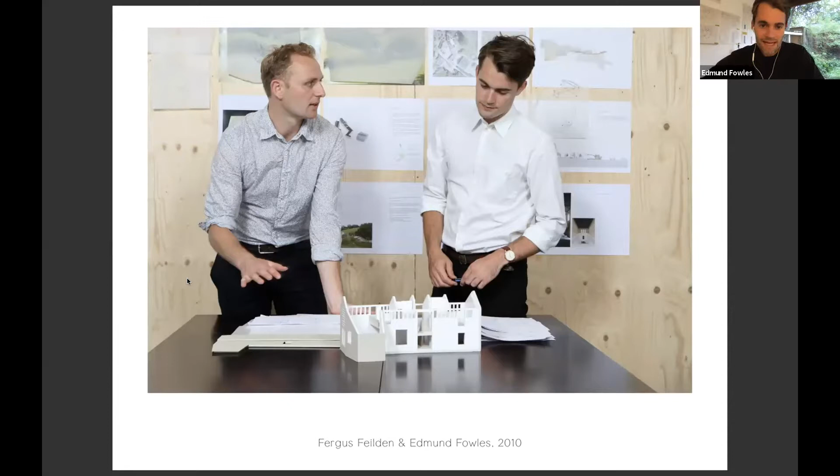And we actually started here, which is a big dirty hole in South Wales, which is where our first project was built. And this was a project for a sustainable longhouse in the Welsh Mountains. And I suppose this project really ignited our interest in an awareness of the impact of what we do as architects. I think it's always surprising for architects when you commit a drawing to paper and then suddenly there's a big hole in the ground, there's machinery everywhere, and there's a building going up on site.

But through this process of making this building, which we were doing during our RIBA Part 2, which is kind of our master's studies, it was an opportunity to really learn through the craft of making, and that's been very central to our approach as a practice. So this was really the kickstarter for us being able to form a practice. We got this building published. We managed to win a few other small domestic projects, and that was all happening.

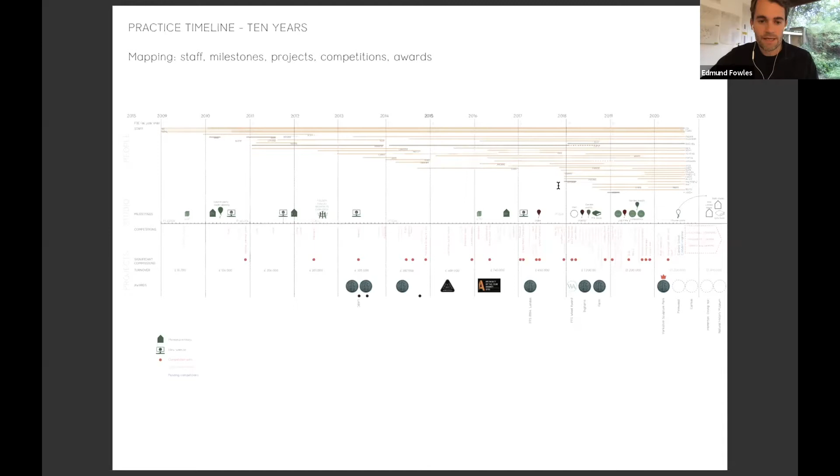This is a practice timeline from 2009 all the way through to today, showing this very long tail of the early days of the practice, with a clutch of projects, which gradually grew, as did the number of people with us, by about 2 people a year through to our present size of 20 architects. There they are there in our garden at the studio.

But as is often the case with young practices, we spent our first 5 years or so really dabbling away with small residential projects, domestic refurbishments. I'm sure projects which many of you are probably familiar with if you've worked in small offices. And these were actually really important projects for our practice to really learn the craft of making buildings, understanding materials. But today I really want to focus on low tech, which is a theme which has begun to run through many of our recent projects.

So what do I mean by low tech? This man has been doing a lot of work recently, making us aware of this rapid decline of biodiversity. So David Attenborough, A Life on Our Planet, I think there's a documentary which has just been released as well.

In the UK alone, 1 in 7 species are threatened. And we all have a role to play as architects. So in the world of ecology and conservation, there's a lot of talk about rewilding. I'm sure you're familiar. There are probably similar schemes in the US as well.

This is an example from Knepp Farm in Sussex, where essentially farmland, which is a kind of monoculture, has very little biodiversity, is left to its own devices and nurtured and encouraged back to its former woodland. And I suppose as a practice, we've been discussing this as the context we find ourselves in. We need to have greater awareness of our impact. Making buildings has a colossal carbon footprint. So what might a rewilding of architecture look like?

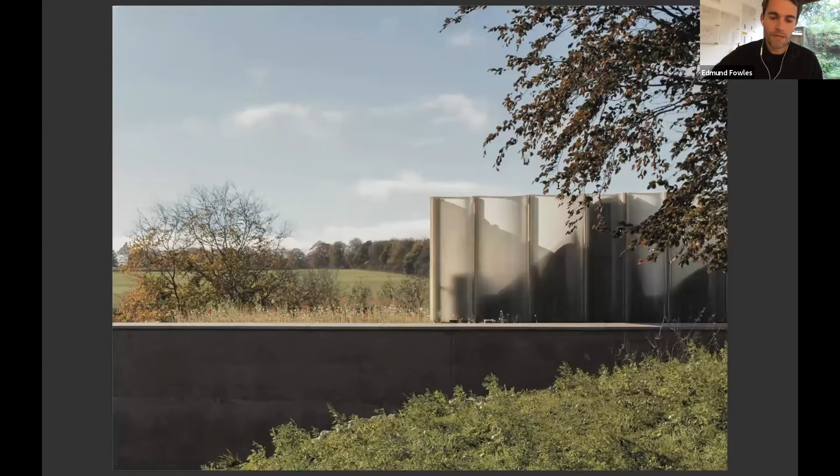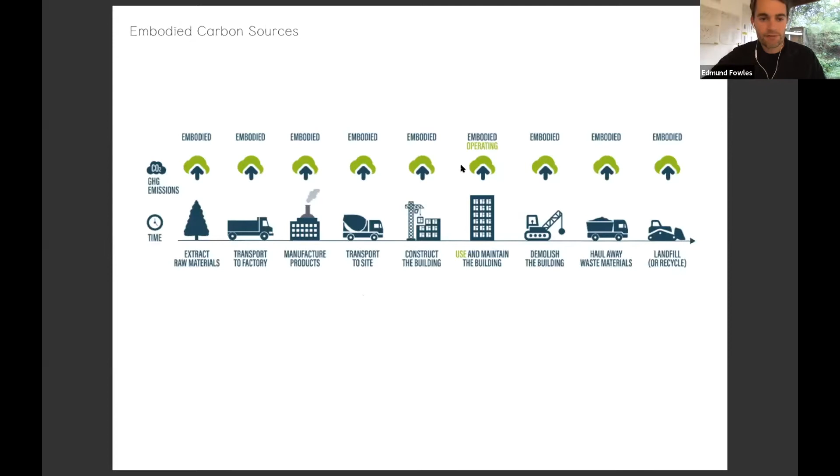What might architecture which is a bit more embedded, which begins with the land and with the site and with the available resources look like? And importantly, as buildings have become more and more energy efficient, the operational energy becomes a much smaller proportion compared to the embodied carbon of making those buildings. Now, embodied carbon can be all sorts of things, from extracting the raw materials through to the manufacturing of them, transport, and so on.

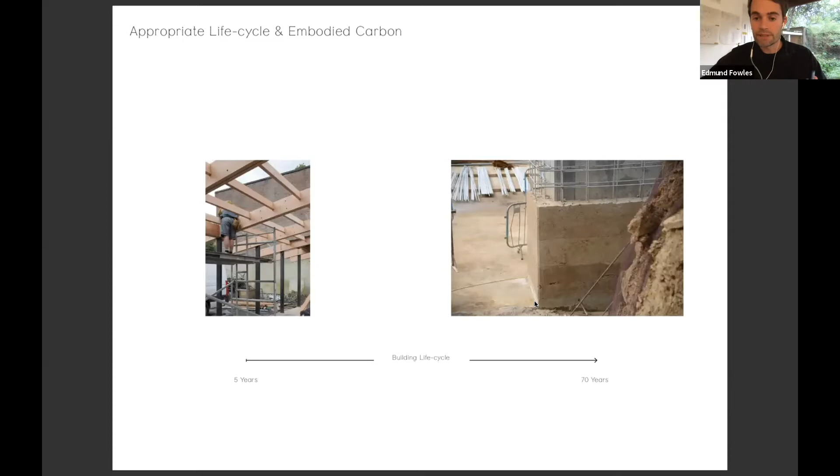And obviously, there's a lot of embodied energy involved through the life of a building, as well as the operational energy. So these are the underpinning conversations that led us to one of our recent projects and the making of our home in Waterloo, which challenges this idea of, how long should a building last? Should it be reused if it's not going to last very long? Or should we be building much more permanent buildings, which are, say, supposed to last 200 years, 400 years? And how might we make architecture like that?

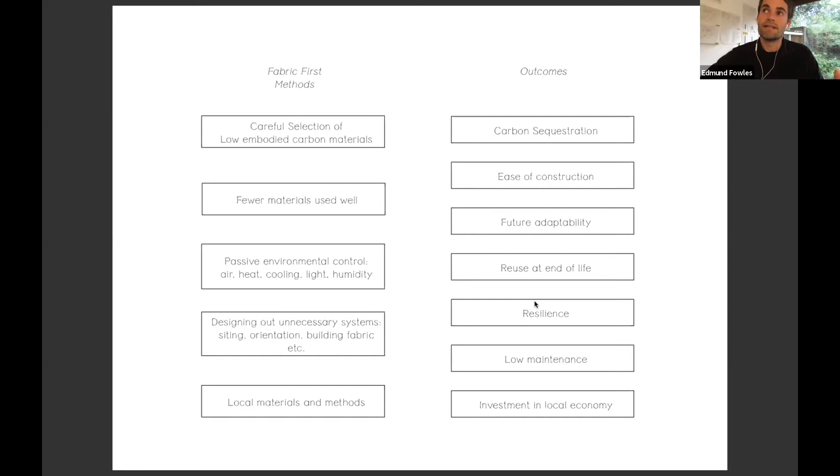So low tech, by low tech, I don't mean that we're anti-technology. Technology has a massive role to play in making buildings smarter. And it's kind of ironic that Philippe used the word innovative in his description of our practice, because to look at many of our buildings, they don't immediately call out, and certainly as a member of the general public, you'd think that many of our works are perhaps buildings from a time past, and we draw lots of our influence from old buildings and from old techniques, because there are many techniques and processes and materials which have been lost to architecture today.

So some of these approaches are summarized here, fabric first approaches. So really starting with the physicality of the building itself, and trying to make that work as hard as possible in order to reduce the amount of bolt-ons of technology that you have to throw at a building to make it energy efficient.

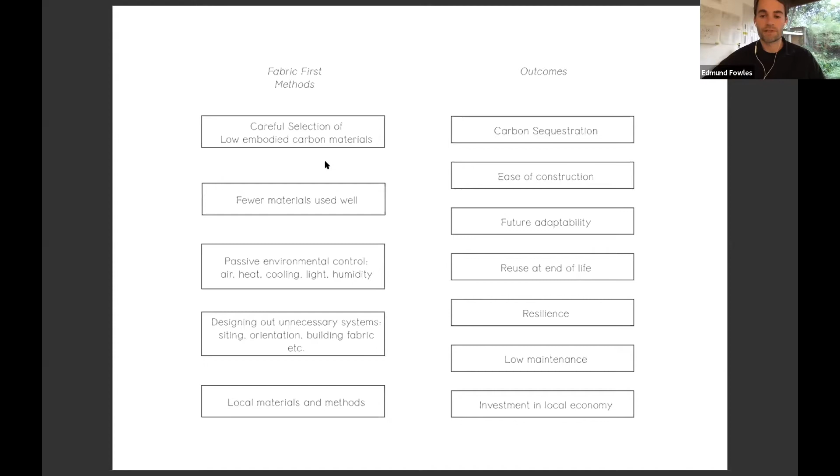So I'm going to go through about 4 projects, time allowing, and talk to you about how we've been experimenting with this approach to making buildings over the past 5 years or so. And that starts really at home. And I think there's no better place to demonstrate your values than where you base yourselves as a practice.

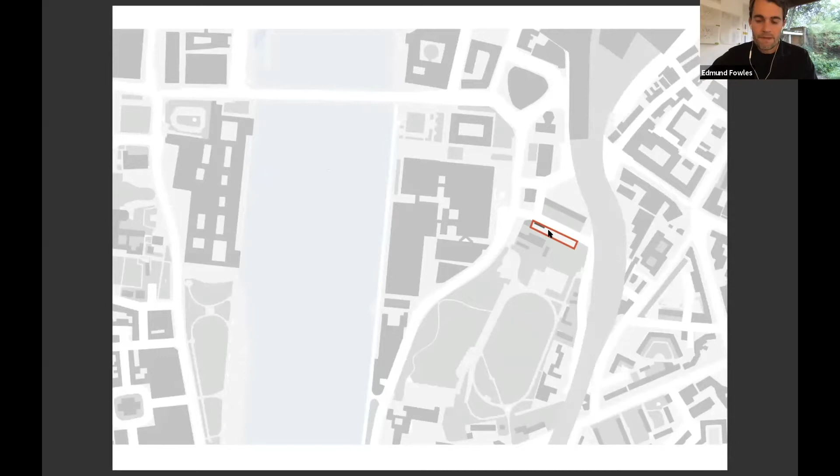And this was a slightly unusual and fortuitous story about our home here in Waterloo. We're just over the river from Westminster. So this is Parliament, just here, the Thames, St Thomas's Hospital. And there was this very abandoned piece of land which was given to a local school for use for 5 years for educational benefit. So really central. This is Westminster Abbey here.

But despite being very central, because we're just south of the river, it's actually a very deprived part of South London. And there's an awful lot of poverty, and children in particular living in poverty. These charities that were offered the land are based nearby, one who runs local schools, and the land was given for the use of getting kids outdoors, getting them to learn from kinesthetic learning, planting, and all sorts of agricultural lessons that could be brought to this site.

So it felt like kind of a perfect test bed for some of these ideas about a light touch approach to making buildings, a temporary type of architecture, which with a bit of forethought could be picked up and moved, dismantled later on.

There was actually a history of temporary buildings on the site historically. So it was a nice starting point to say we're going to be putting back some light touch buildings, but thematically thinking about all sorts of opportunities through the theme of food, whether that be food production, cooking, and nutrition, kids learning about all those things. So we began developing this master plan for the site.

And I should say that there was an interesting economic strategy behind this site. As we became more involved, we realized that the charities didn't really have enough money to pay us fees to deliver the whole project. So we suggested that we could become more involved in the project, design everything, get planning, and help them deliver it, help them fundraise, in return for us building our own studio at the end of the site.

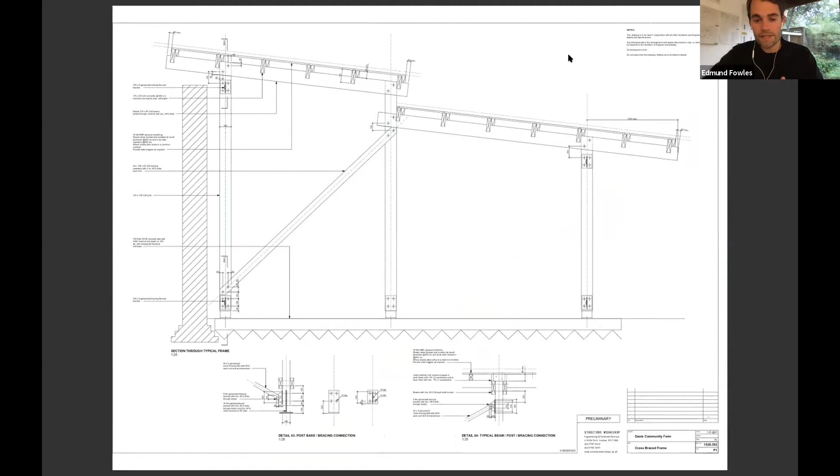So we were quite inspired by really rubbish farmers' carpentry, bush carpentry, just the way that things could be put together by very low skilled labor, therefore cheap labor on the site, to make the initial farm buildings. So lap jointed, using very regular section sizes of timber. And the first phase was delivered within the first year, which allowed the kids to get on site and start getting stuck in with these pigs in the animal pens, there's sheep and goats, there's grow boxes. So that was this whole central section of the site that we began with first.

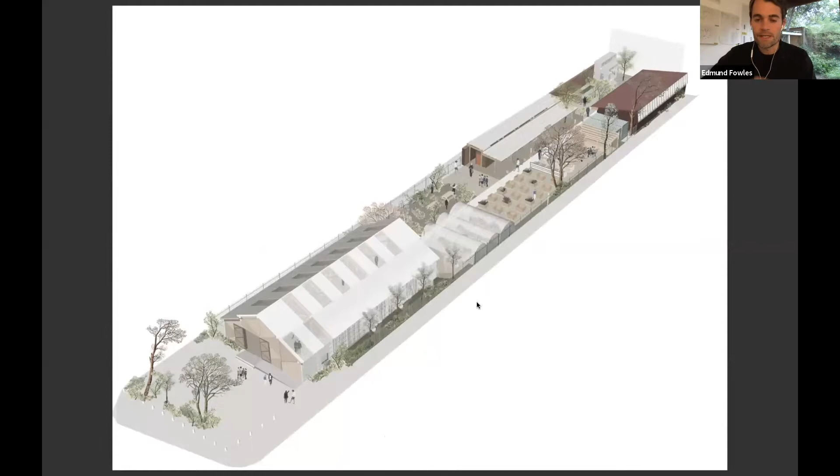And then we moved on to developing the studio site, which would also be shared with the staff and the team who run the farm in terms of shared workspace, shared provision of toilets and meeting space and so on. And again, we used this theme of very low tech, simple means of construction, borrowing from agricultural precedents. And we liked this idea that the building might have quite a blank, enigmatic presence onto the street, through which you came through a garden gate into this lovely wilderness of a garden. And the positioning of the building was key to that.

We were also very keen on the tradition of artist studios, bringing in ample north light from these lovely high windows. This is the Royal Academy of Art, their drawing and painting studio in London. So with this in mind, in terms of starting with the fabric of the building as the first principle, we moved it all the way north up to the road's edge to form a boundary building. And then that formed this really generous south-facing courtyard garden.

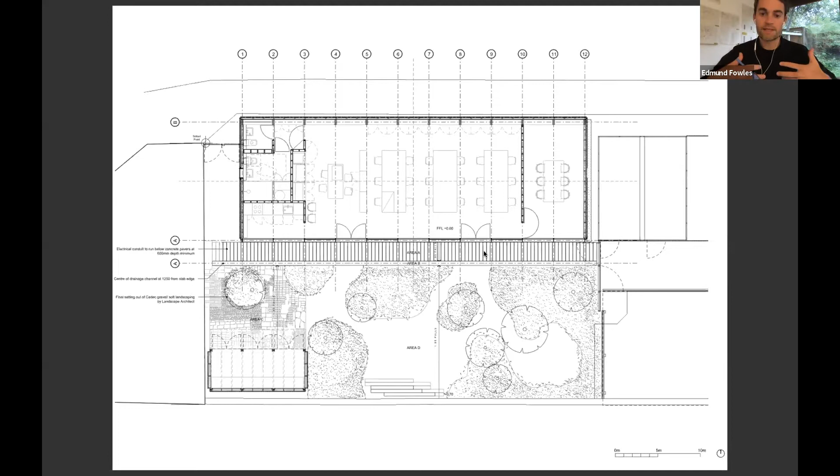We made a very heavily insulated shell to the building, but south-facing with overhanging eaves that should allow lots of winter sun in to heat the building in winter. And there was lots of experimentation with the roof form and how to span the distance in the most economical way without having too much thrust on the perimeter walls. So the technical and the economic challenges of building as cheaply as possible were really driving the form of the building and making the form shift.

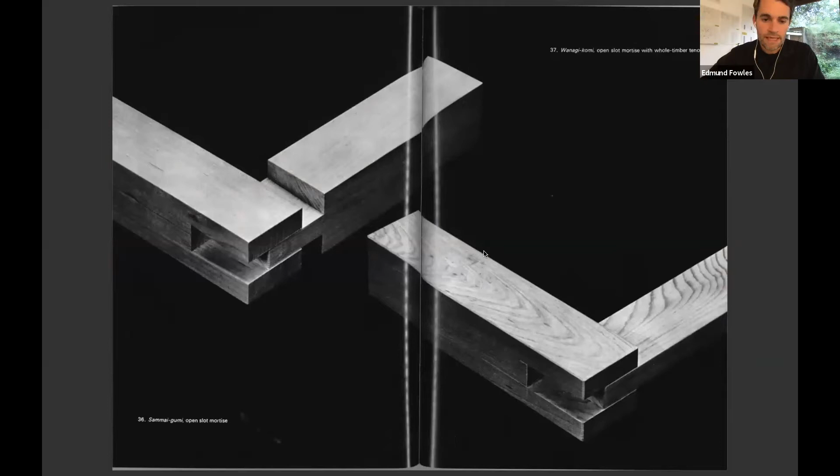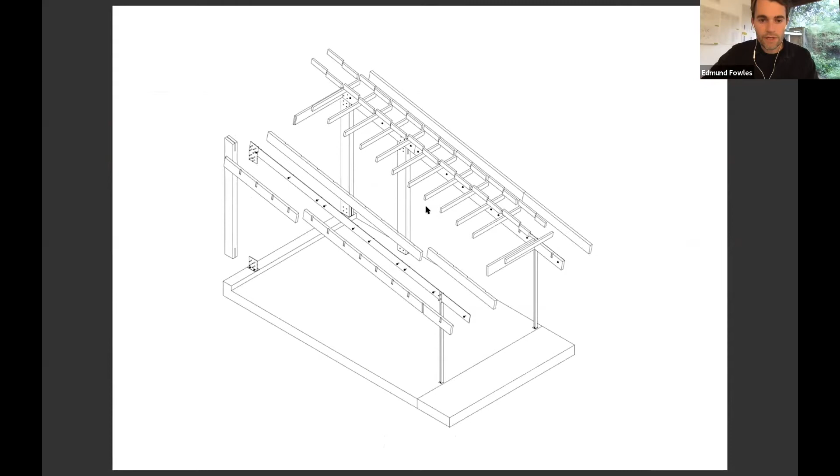We worked very closely with the standard sheet dimensions, using the standard 4x8 sheet for sheathing, and then all the components being easily dismountable, which was driven really by the connections being all pin jointed with stainless steel pins. And this was all tested in the workshop just to see how easy they were to take out.

And then as well as the construction of the building, we were thinking very carefully about the heating and ventilation and so on. And this detail emerged. It was a lot cheaper to actually have a fixed casement window on the north of the building to let the light in, rather than an expensive openable window with hinges and so on. And instead just have a very simple hinged piece of timber down here, which allows airflow above the height of people in the studio, about 3 meters height. So getting a really good cross ventilation through the space.

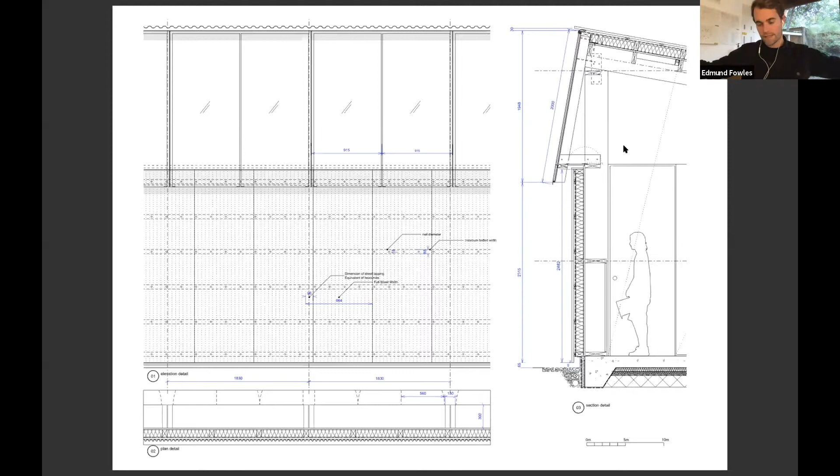We used very simple agricultural materials; this is a material called onduline, which is recycled fibers bound together in bitumen. And we worked with a couple of local craftsmen. Alex actually worked for us as an architect and became a timber framer later down in his workshop in Devon.

Lots of prototyping down there, but using very simple techniques, making jigs. The building was very repetitive, so that made it very economical as well. All the joints were cut simply by hand. The joists were housed because it made it easy for them to be taken out at the end of the building's life. And whilst all that was going on, the slab was poured.

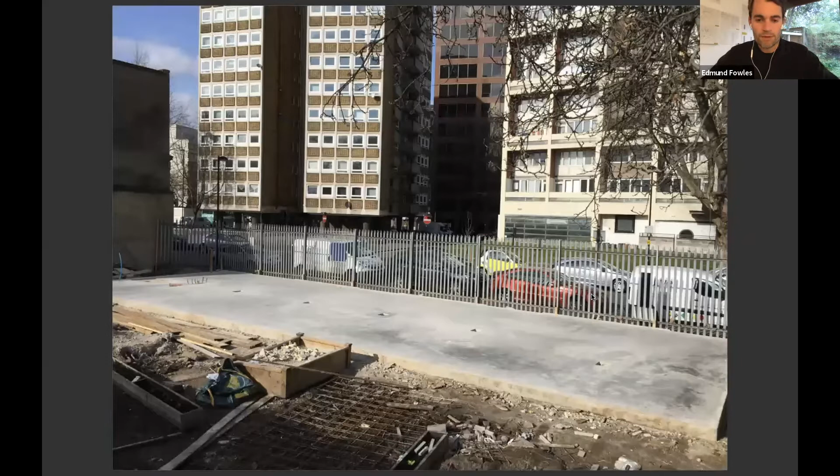And I think this was a great opportunity for the whole studio really to learn from the process of building. We're a relatively young studio. I think most of the studio are still under 30. And so this was a really great opportunity for lots of the team to see a live building project on site, almost day by day, as it went up.

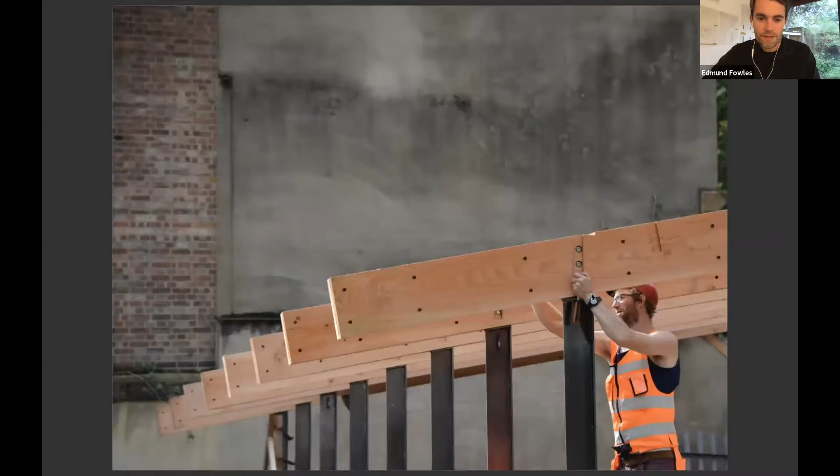So I'll just flick through some of the construction shots. This was the frame going up, which went up in about a week. And then it was quite nice to see a timber frame going up with this backdrop of larger 60s and 70s buildings at the hospital.

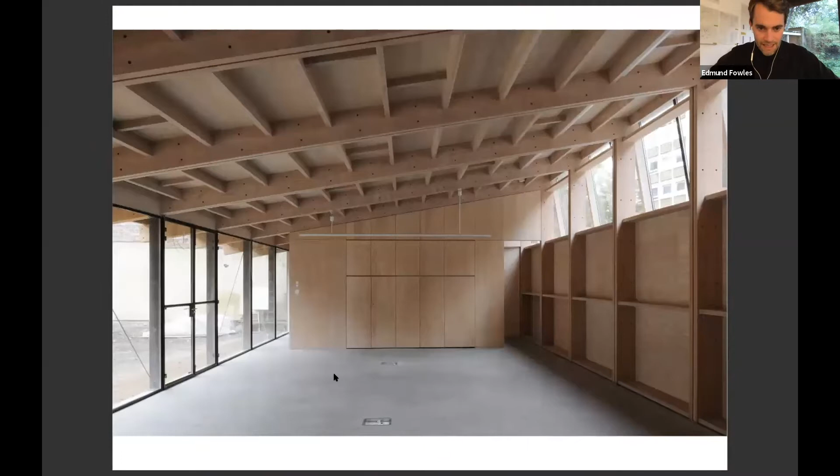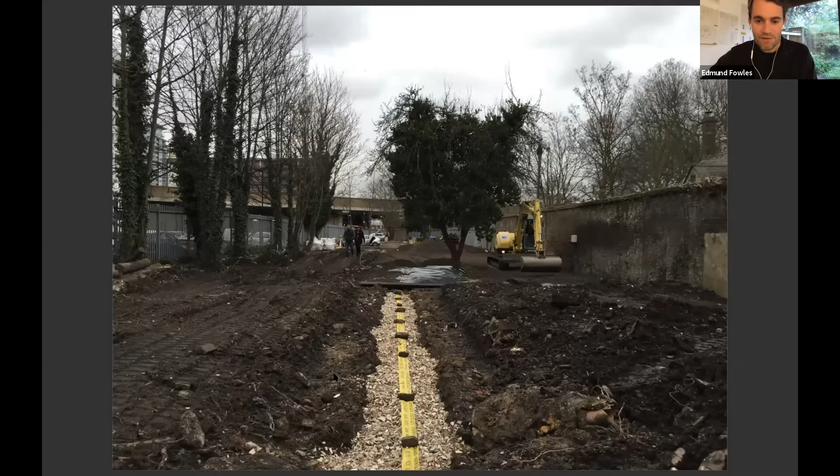And the resulting studio, I think it's been so transformational for our practice, not least because of the amount of extra space and this connection to outdoors, having a garden space that we can spill out into. We can make models outside. This is a before and after image showing the transformation and the landscaped courtyard. And this just shows the building in use.

And so this was the second phase, the last phase being the barn at the other end of the site. And this was really crucial for the economic sustainability of the whole site. So this was a social community space which would allow bigger class groups to congregate from the schools, but also out of hours, evenings and weekends, it could be let out to generate a revenue. So using very similar principles to the other buildings on the site, very simplistic joints.

And this was the barn in activity. So these are some of the rental activities that go on to generate a bit of revenue for the charities and sustain the whole site. This is an uninsulated building, but perfect for summer events in particular.

And then at the other end, there's the more tranquil, secluded garden. And it changed the culture of our practice because we have this place that we can sit outside, that we can, if we're having a tough day of meetings, garden outside, but also the garden room here, which is a model making space.

And I think importantly, it's been an opportunity to bring lots of our clients through the office and demonstrate our values in built form. Perhaps rather than sending them a brochure, we say, well, come and visit us on the farm and see the studio.

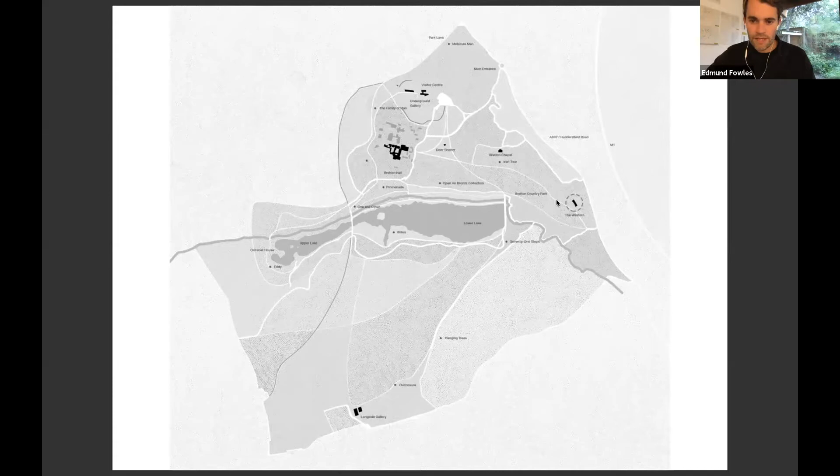So the original visitor centre was up here to the north. The north part of the park was really heavily peopled, but the rest of the park less so, because there were no kind of facilities for parking or for getting a drink and refreshments and toilets and so on. And they wanted more sort of gallery space as well. So this location was strategically agreed upon.

And we began to really immerse in the work of the park, both the more traditional sculptures in the round, but also works by James Turrell. There's a fantastic piece which is situated within this deer lodge. And for us, this was a really beautiful knitting of existing fabric with this new intervention, which is sort of dropped in, offering these wonderful, very contemplative lighting qualities, but also more subtle work, such as David Nash in this work, where he positions these charred timbers as a row of steps.

The site itself was a depression in the land. It was formerly used for quarrying stone to build the stately home and many of the existing buildings across the estate. So it was very much a boundary building right on the edge of a road, a motorway, but then bounding the edge of this wonderful park with views down to the lake.

So we had in mind the work of land artists, and this idea that we didn't want to just conceive and design a building and plonk it down on the land. We wanted to really work with the topography. It was such a dramatic topography, giving way down to the lake.

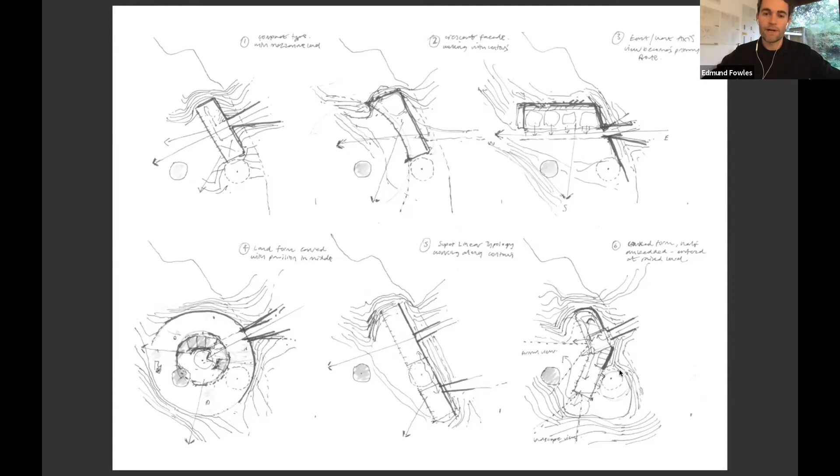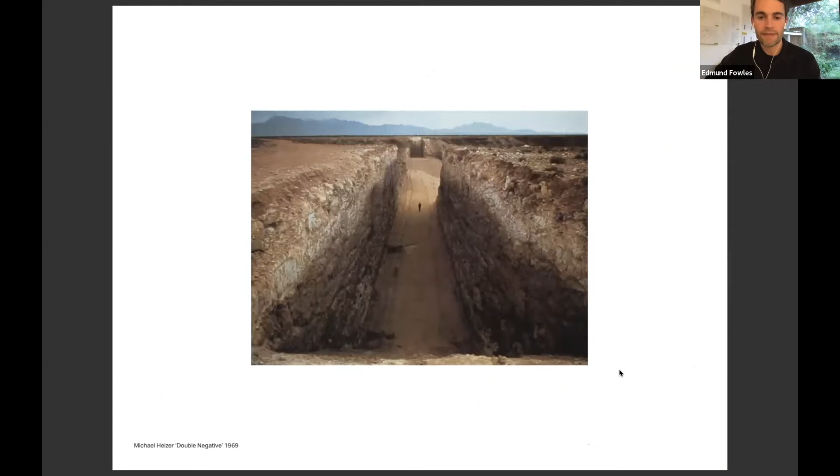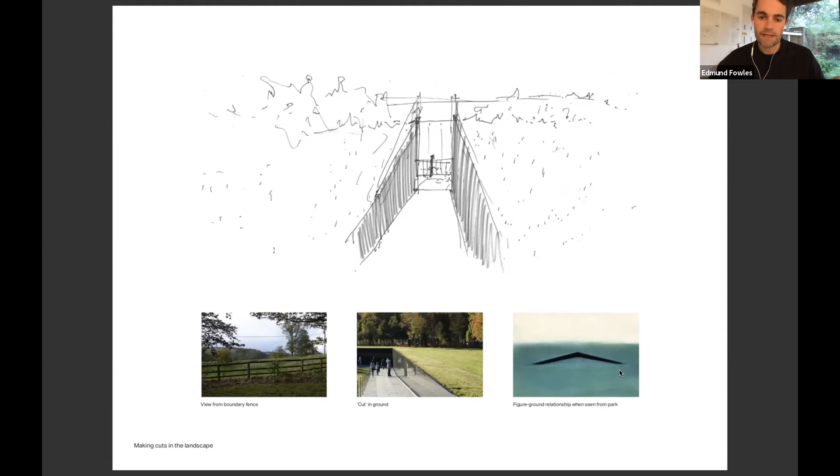And there are some wonderful works by the likes of Michael Heizer, the minimalists of the 60s and 70s, who began in the galleries and then wanted to break the boundaries and start working at much bigger scales outdoors. Robert Morris, and taking these sort of approaches to moving the land and working with the landscape to form space, as opposed to the traditional idea of constructing space. So that was the initial thinking behind it, really enveloping the building in its context.

And that worked quite well actually for environmental considerations of the building. So thinking about the conditions that one needs for a gallery space in terms of very constant temperature, very constant humidity and lighting levels, that works very well for embedding it into a hillside. Whereas the more public elements of the building, we had to form a restaurant and cafe, shop and so on. These were positioned as more of a lightweight pavilion, which was moved out of the ground.

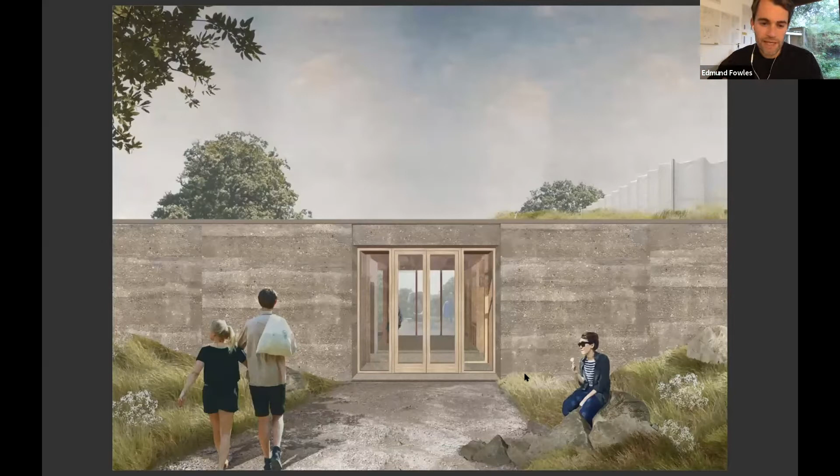So conceptually, we wanted to really reinforce this idea of the boundary to the site with this single cut through the building, which was the gateway into the park. And that was reinforced by this idea to use aggregates that we were excavating from the site in order to make what originated as being rammed earth, but later, for stability reasons, we had to add a bit of cement in there, but ostensibly a very weak concrete mix.

So this shows the three tectonic elements, I suppose: these rammed concrete walls, the gallery dropping in, very heavyweight construction to moderate the humidity, and then the lighter weight timber frame.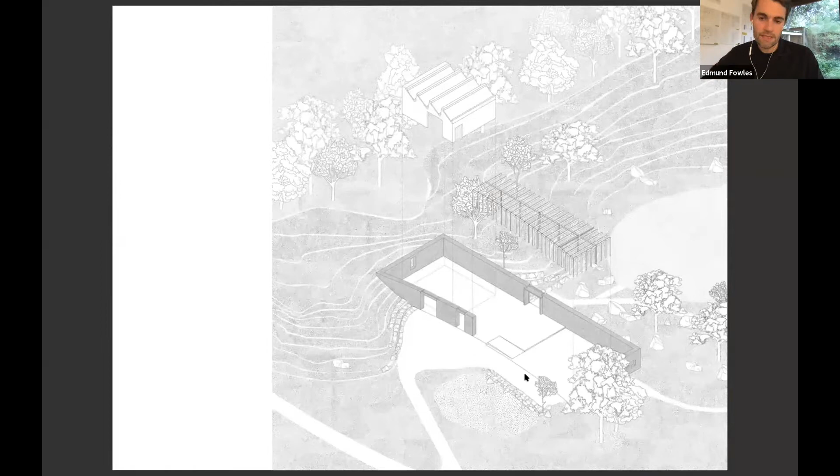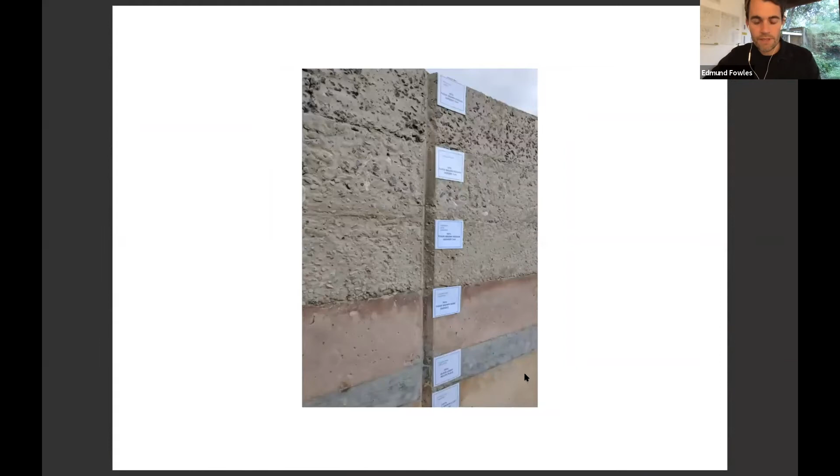We searched lots of the local quarries as well for aggregates to use, as well as some sourced from site. And we were keen to match the tones as closely as possible to the rock that we were pulling out of the ground, which had this very red iron oxide-y tone. And drawings developed and refined this language of a quite striated, almost sedimentary rock form.

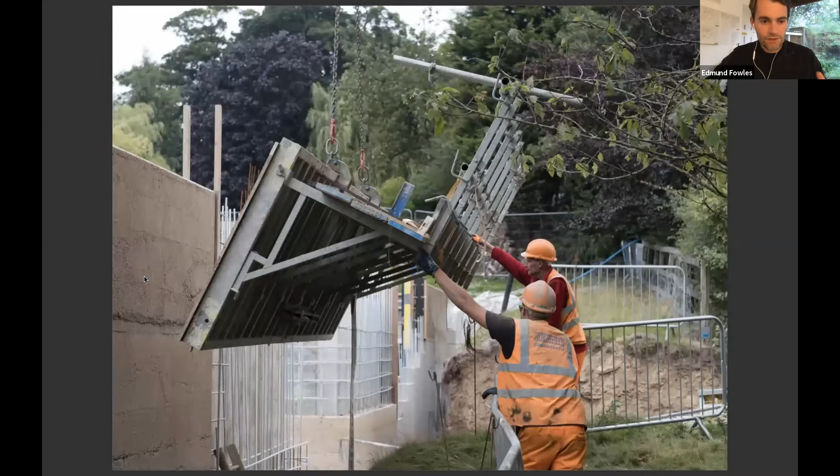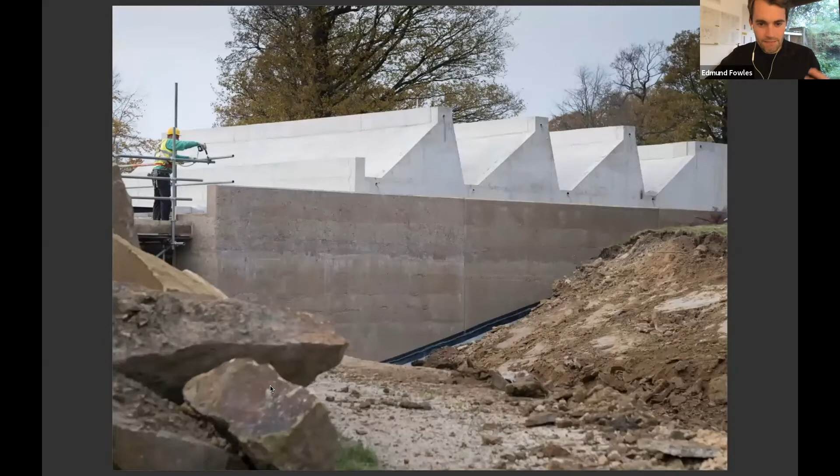All the material was batched and mixed on site, pulled into the formwork. And you can see the very dry mix, very open, porous form of the walls. And they've changed throughout the whole project as the aggregate was varied. But this rock down here is a good example of the tones that were present on the site and how it tied through.

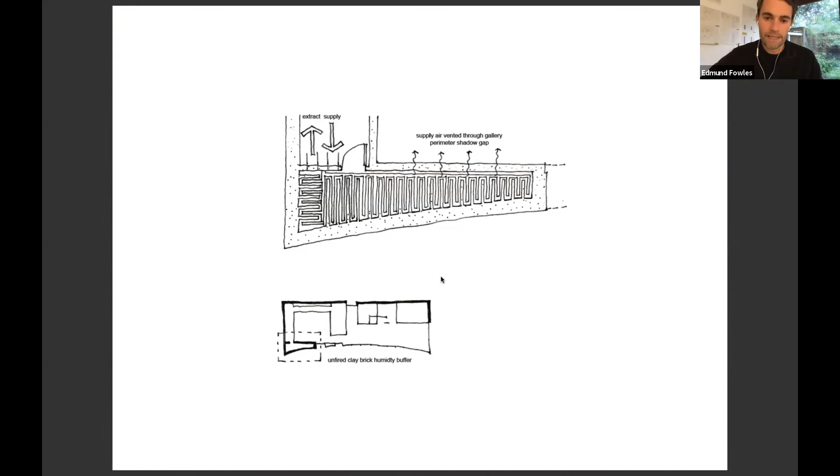So in terms of moderating the humidity, this was a conversation that emerged with one of the M&E engineers about the potential to use unfired clay bricks to moderate the humidity rather than pulling air out of the gallery and passing it through a big piece of HVAC machinery and using lots of energy in the process. We pioneered this approach to draw air through a labyrinth of 10,000 unfired clay bricks.

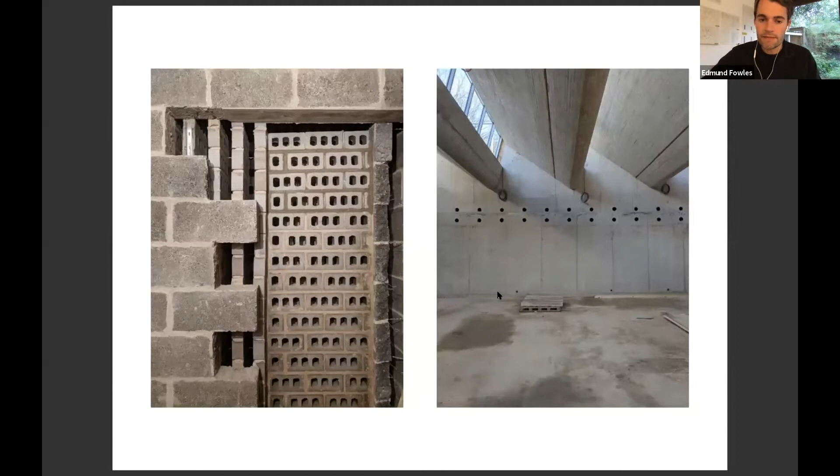So these are the clay bricks in the void here. And this void was created by the gap between the retaining structure and the internal gallery walls. And it's become very effective. We've been monitoring it for the last 2 years since the building opened. The only mechanical assistance it needs is a fan just to draw the air through when there's high or low humidity. And the clay is hygroscopic, so it draws in the moisture when it's very humid and lets it out when it's not so humid. So this is the resulting building.

So there's lots of overlap, I suppose, with the learning that we made on building our own studio here in Waterloo in terms of the timber frame. So it is really a building of two halves: this lightweight pavilion, which is perched on the edge of the hill, but at once also embedded into the hillside.

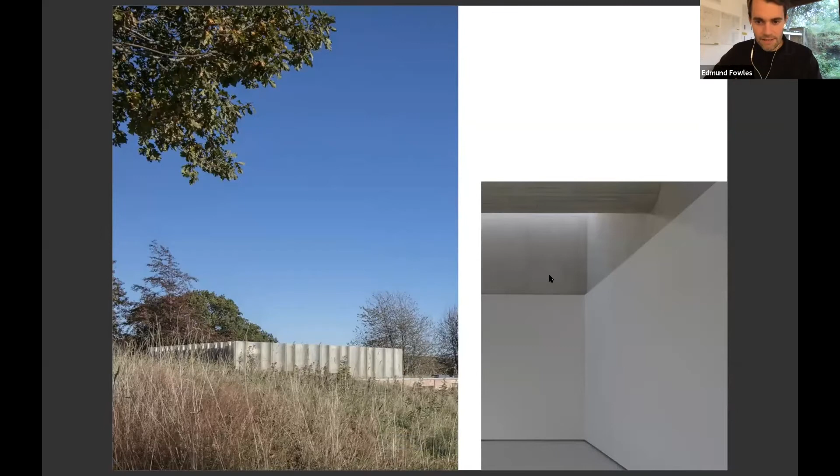So at its deepest, the land really obscures the height of the gallery. We've got about a 5 meter floor to ceiling in there, but it just crests the horizon of the hillside here. And then the wild grasses, acid moorland, local grassland is able to grow up and over the roof of the building. And these large concrete beams were working quite hard in themselves as well, forming roof lights, but also valleys to the roof and dropping in this very nice diffuse light.

And then moving through to the restaurant space. And there were other material decisions, such as using lime plasters, natural plasters, which have this very distinct patina. It's very imperfect, which felt consistent with the exterior walls.

So this was a building that was shortlisted for the Stirling Prize last year, which was much to our surprise. But it has been a really good opportunity. It was our first truly public building, so an opportunity to demonstrate some of these more grounded, earthy approaches to the materials. It was a good process. And through the making of the building, we were making a book as well. So this is now available on our website if you're interested in learning more about this project.

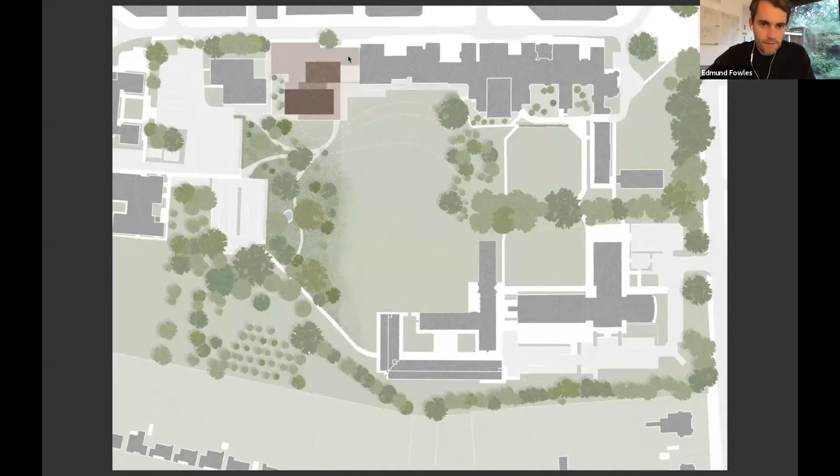And we began talking about the project in terms of an arts and crafts for the 21st century. And I think this sort of low-tech, more aware approach to making buildings and an awareness of the sourcing of materials and so on is so akin to what the arts and crafts movement were calling for. They were calling for the hand of the craftsman to be more visible in the building.

So broadly speaking, the brief was for a new dining hall, a new formal dining hall, seating 300 students, but inevitably with a big kitchen which served not just this hall, but also the wider college as well. So in amongst that, though, we wanted to pull the brief apart a bit and look at the more social aspects and the importance of food as an activator or an opportunity for chance encounters around a collegiate environment.

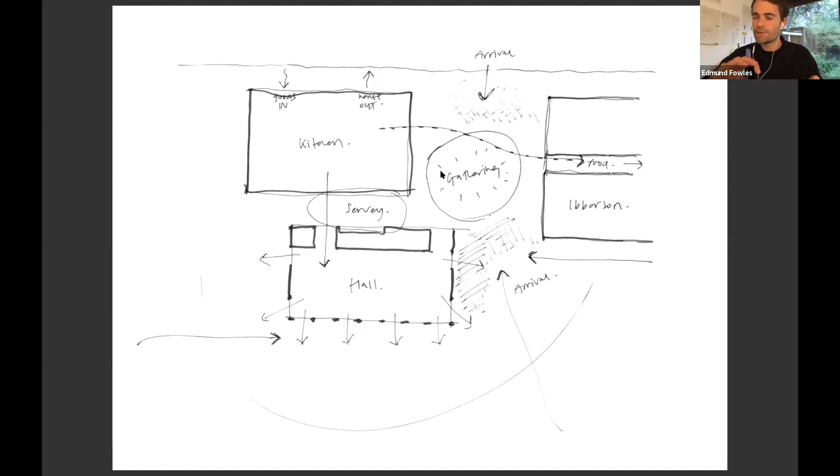So not really focusing just on the design or the intensity being on the hall, but on these fragments of space or in-between spaces around the building. So we actually grew the brief somewhat from the original competition brief.

We were very interested, I think, through the competition process with architects like Van der Laan and his monastic work, building very simple, robust structures in the Flemish regions. And we were working off many of the existing rhythms established by the Ibbotson building with this lovely rhythm of brick columns.

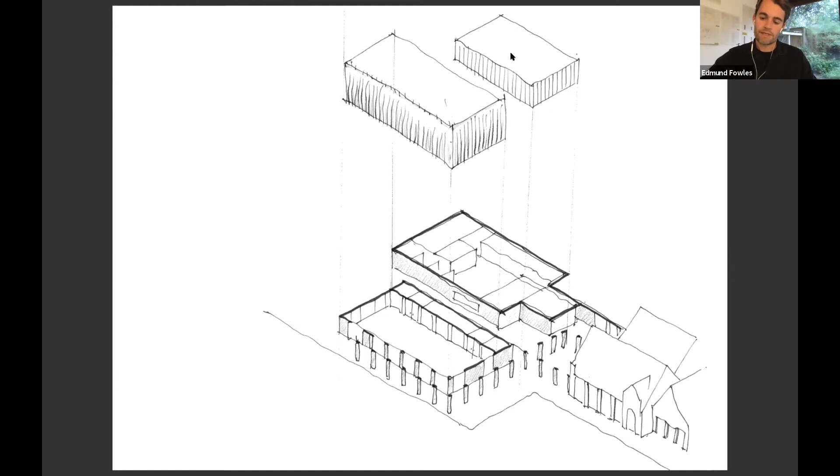But with this idea to place these two volumes, so have a plinth, which was very expressed at the base, and then the hall to be articulated, and the buttery and gathering space, the foyer space, to be accentuated with another volume, slightly offset, and each to have a slightly distinct material character.

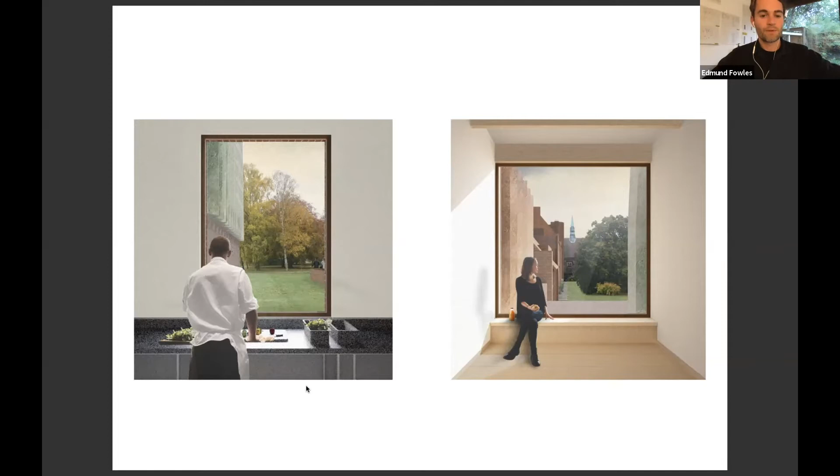There was a lot of interest as well in the quality of life for the people who work in the building, not just the students, but what about the chefs who have to work there, who presently are in the depths of a Victorian building with no daylight, no views to outside. So this image was really important as a thing to hold on to through the project process, hanging on to getting daylight into the kitchens and having a kitchen with a view. So when you're doing your prep, you can look out the window and you're not in the basement.

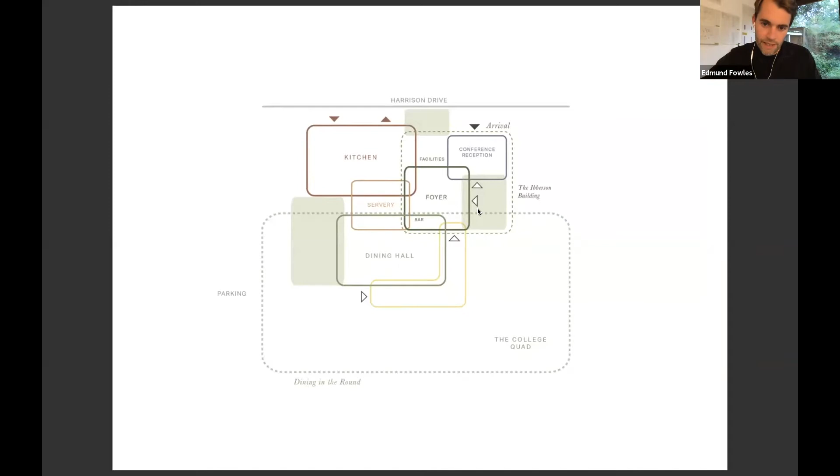So this is how the brief then coalesced, with kitchen, dining hall, this servery sitting between the two. So obviously lots of very critical flows involved in designing food spaces. But with the foyer here and the main college entrance. And the resulting plan, somewhat more worked up, looked something like this.

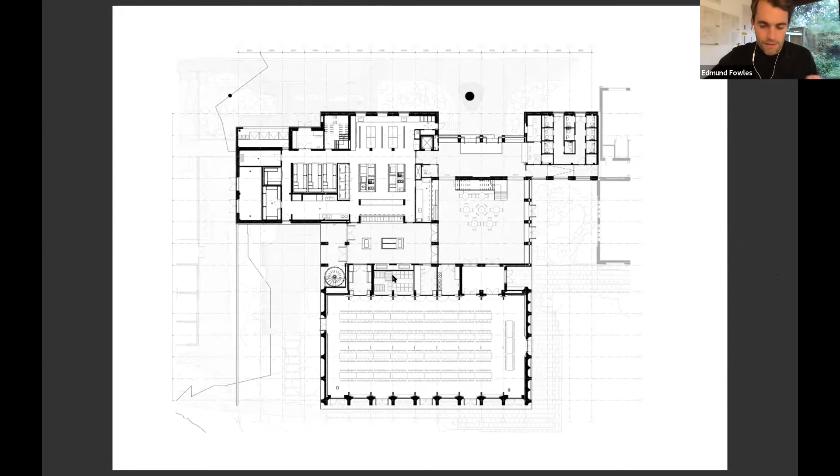So a very strong axis coming from the existing college facilities, accommodation, the bar, down to this generous entrance lobby here. And then this double height gathering space, which out of hours could be used for more informal use, picking up a sandwich or a cup of coffee, the servery, and then this very hardworking spine, separating the building, but also acting very importantly for some of our servicing. And then moving up to the first floor, the balcony space, which overlooks the hall.

So sectionally, the building slightly inverts the typical Oxbridge dining hall, which tend to be very hermetic. They're very enclosed at ground floor level particularly. We wanted to really open up the base of the building with windows out to this small area of woodland, but then also drop in a lot of daylight from clerestory windows, which could mediate passive ventilation as well, with openable windows at high level. So drawing air in at low level and out at high level. We also utilised ground source heat pumps to bring a relatively passive form of heating to the building.

And then there's a small degree, when you've got 300 people in this hall, we have this ability to draw the air out of the hall and then exchange it with heat coming out of the kitchen and put it back into the hall. So there were these sort of ideas about the circulation of heat in the building.

So going back to some of the more material qualities, these were some of the features of the surrounding buildings, and particularly the Ibbotson building, the Arts and Crafts building. This beautiful array of tile and ceramics.

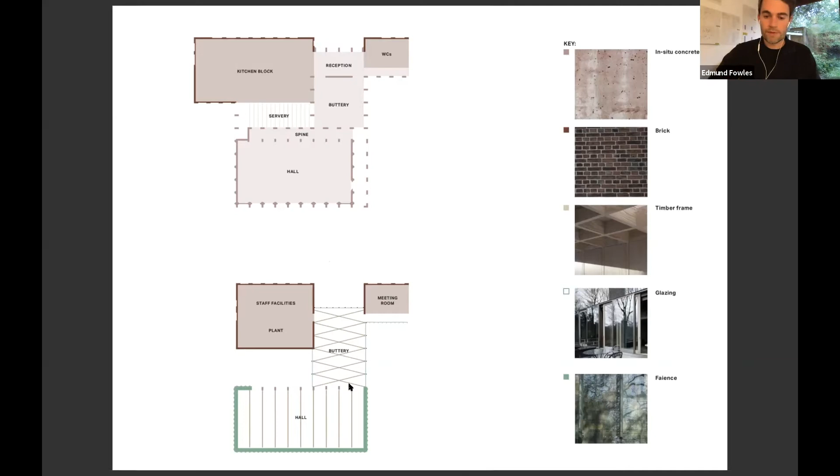And so the principles of this very hard-working plinth, which was mediating all of the functions of the building, was established, having this outdoor cloister and an indoor cloister with the servery, an expanded perimeter to the main hall. But each of the main primary public spaces would be framed with a timber frame which was supporting the roofs. And this was the emerging tectonics of the building. So the plinth, as I described, and then these two timber frame structures.

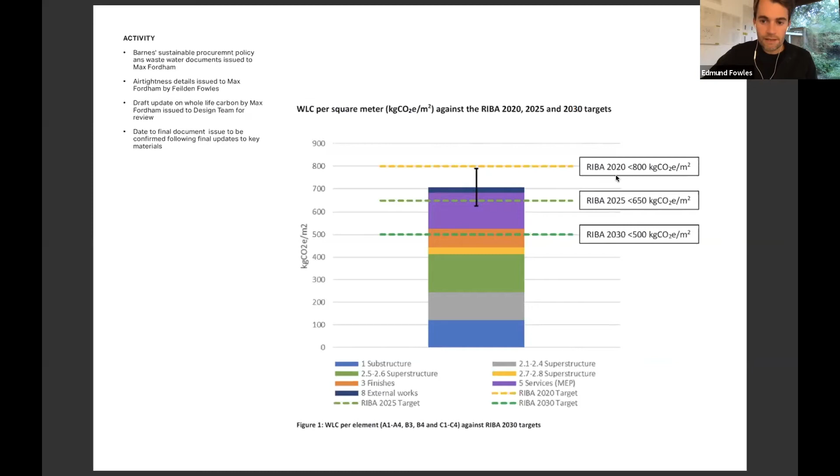And throughout this process, we've been working with Max Fordham, M&E engineer, to understand the embodied energy of all the materials. And actually, after we started the project, the RIBA, our governing body, brought in some really radical targets and graded targets. So bringing in targets for 2020, 2025 and 2030 in terms of embodied carbon. And although we were 5 years into the project already by 2020, we're aiming to exceed that and bring it in at under 650 kilograms of carbon per meter squared for embodied energy.

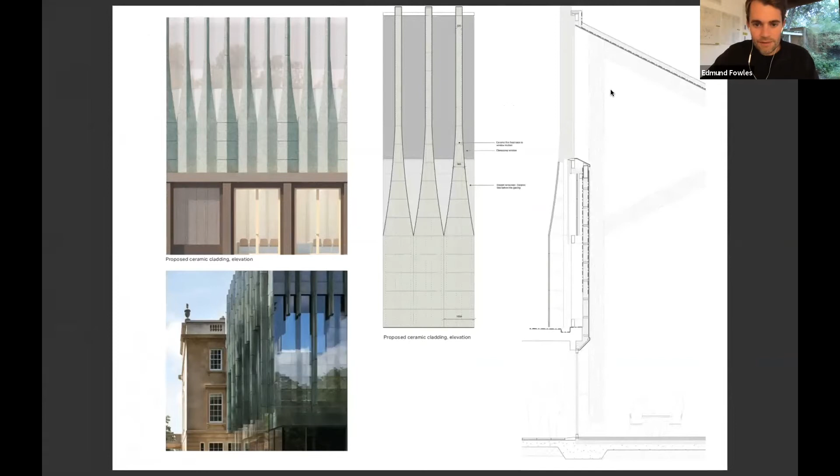So the material, we've been drawing a lot from the arts and crafts and the Gothic of the Great Hall, and we wanted to give a real depth to this elevation, which would partly serve for shading to those great big clerestory windows. And this material of faience, a ceramic material, is quite common on pub frontages and tube stations and so on. And tiles, obviously, widely used within the arts and crafts movement.

So we began to work with this supplier, this fabricator, Darwen Terracotta, who produced these extraordinary glazes, which really resonate with the copper oxide on many of the roofs at the college. This blue tint, which is given through the glazing process, paired with the more earthy tones of the plinth of the building, which would be a low cement concrete.

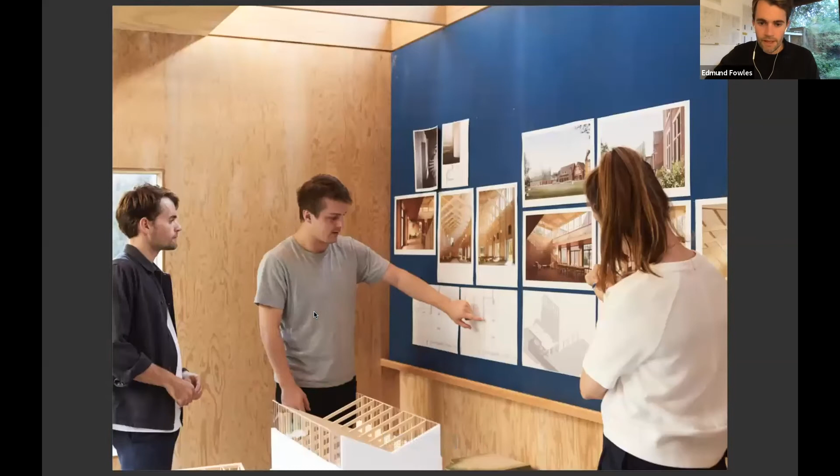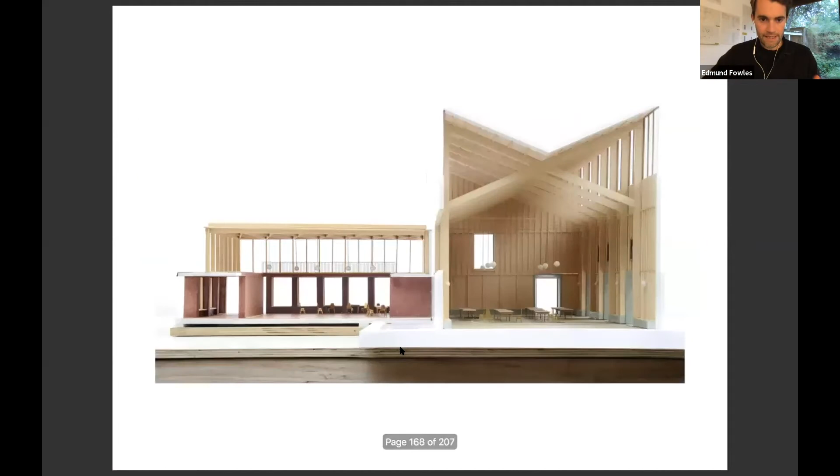And we experimented a lot through model making. So testing the interior qualities in 1 to 50 scale and 1 to 20, following up with design reviews and iteration, and really playing on some of the themes, some of the qualities of the traditional halls in terms of their very formal, solid paneling at the ground floor level, but really opening up the top of the building. So this is the resulting 1 to 50 model we made.

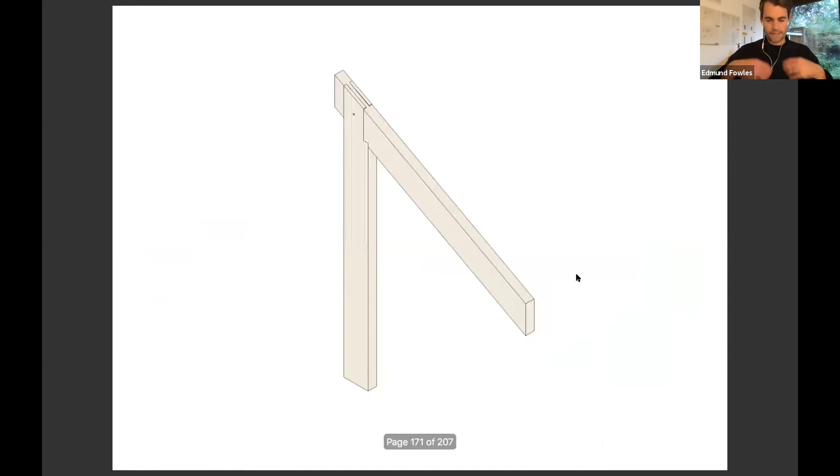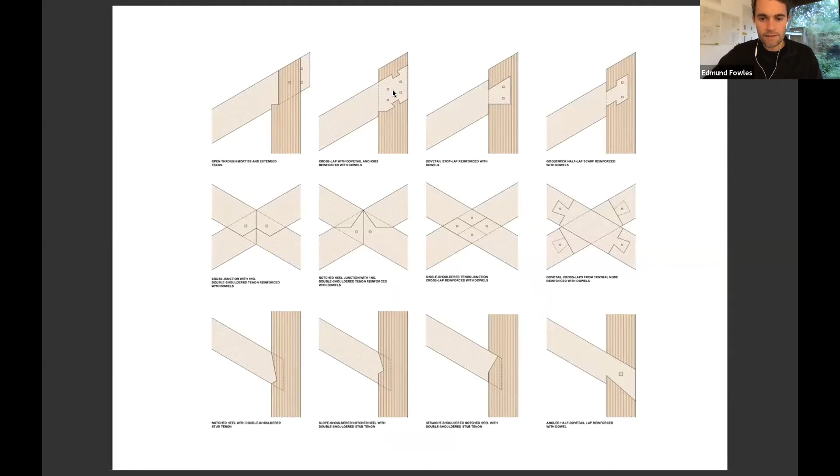And structurally, this timber frame, we wanted to really articulate internally and express these joints and allow those to tell the story of how the joints are put together. So they're all just doweled joints. So they slot in and they have these doweled and pegged joints at the eaves and at the center where the butterfly crosses. This was something that was tested again at a slightly larger scale in terms of the angles of roof, where it met the perimeter of the building, how that tied through with linings, and followed that through to the other public spaces in the building.

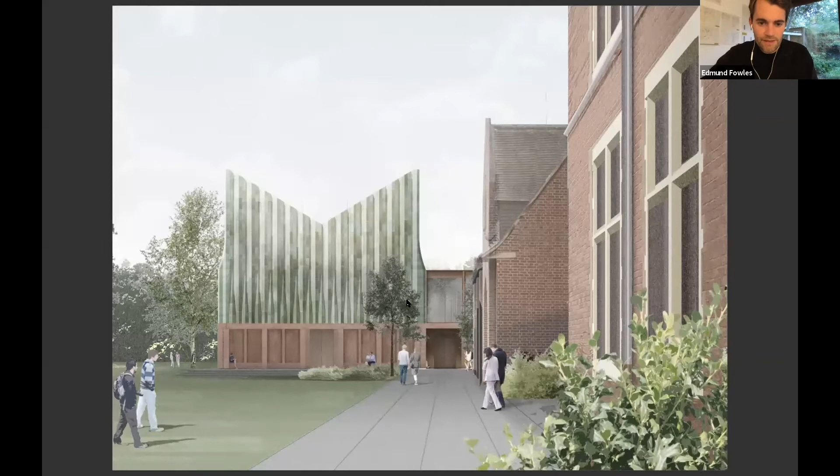And this was the approach from the college side, showing the faience cladding to the top there. And I think despite relatively heavyweight materials being used, and obviously faience and ceramic has an embodied footprint, it has to be fired at 1,000 odd degrees, it's still much less than concrete, full fat concrete, as it were. And the brief from the client for this building was for an incredibly robust building, which would be there for at least 200 years. So rather than a very lightweight building, we had to make a choice about very robust materials on the perimeter, on the envelope of the building.

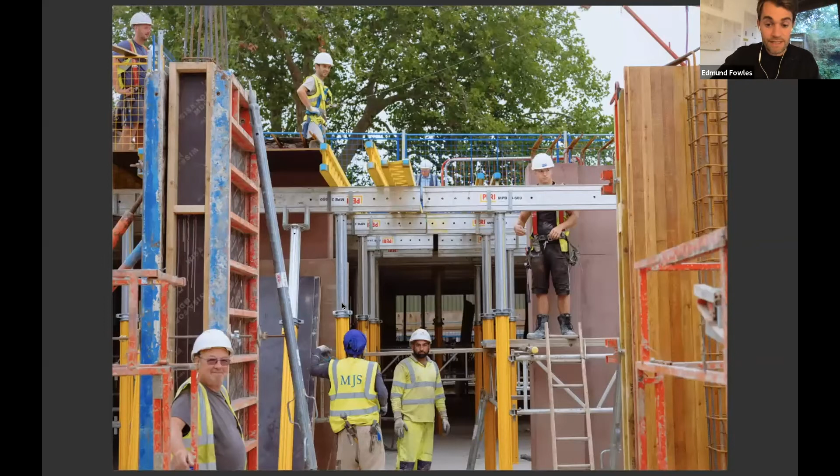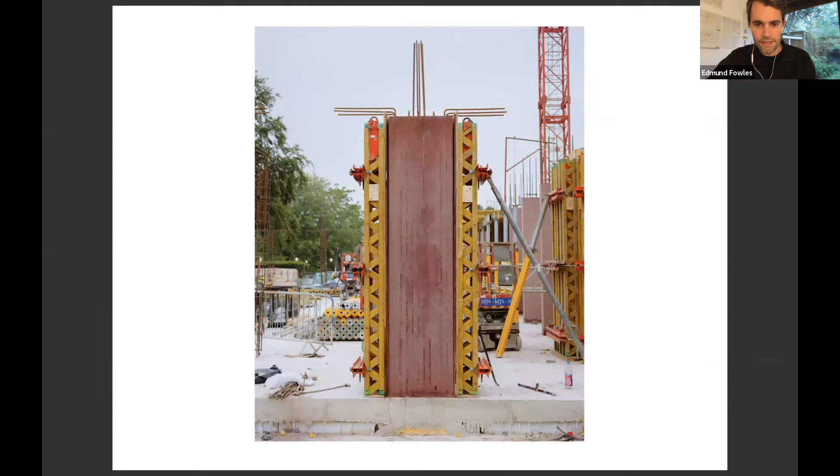So this has recently begun on site. So this is some of the guys on site making this plinth, crafting some of the formwork to form some of the curved concrete columns at ground floor level. And these are all dyed with this natural iron oxide pigment. And some of the early tests that we've been doing with the ceramic glaze. And we're hoping to complete this project in about a year's time. It's still a fair way to go on site.

So just briefly to touch on, I'm going to end with this project, which is a project for the Natural History Museum in central London, in South Kensington. And this really epitomizes many of the themes the practice has been touching on. It's very directly related to the farm and studio site here in terms of creating a learning environment with buildings and gardens, very interconnected.

Many of you may have visited the Natural History Museum if you've been to London. It's a very popular tourist destination, an extraordinary collection of natural history. But the gardens aren't quite fitting for the magnitude of the collection that exists within the museum.

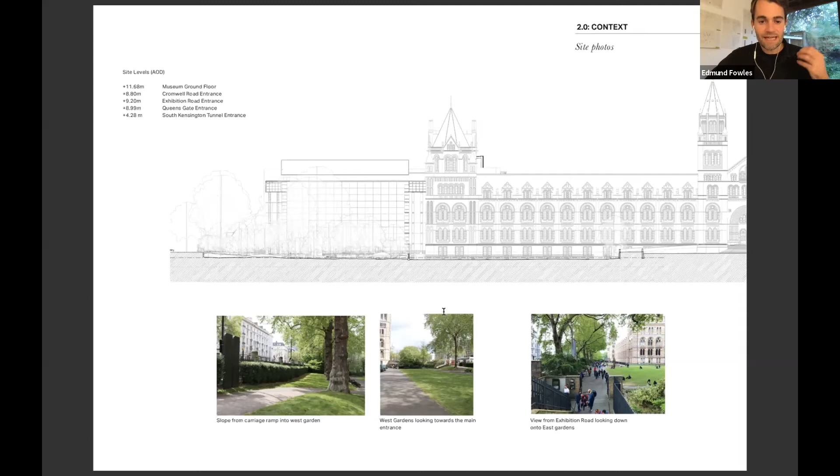And the Natural History Museum has launched this wonderful project, the Urban Nature Project, which is in part to improve and tell the story of past nature and future nature within their gardens, taking, I suppose, lots of the knowledge and exhibits that are held within the building and putting them outside the building as a showcase. And this is really to engage young people in particular in the excitement of botany, of biodiversity, and really alert them to the challenges that we're faced with at the moment. And it's important to educate in order to do that.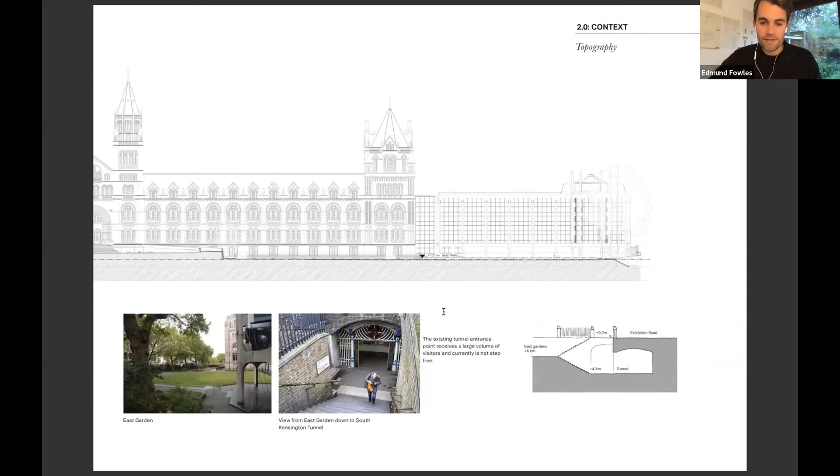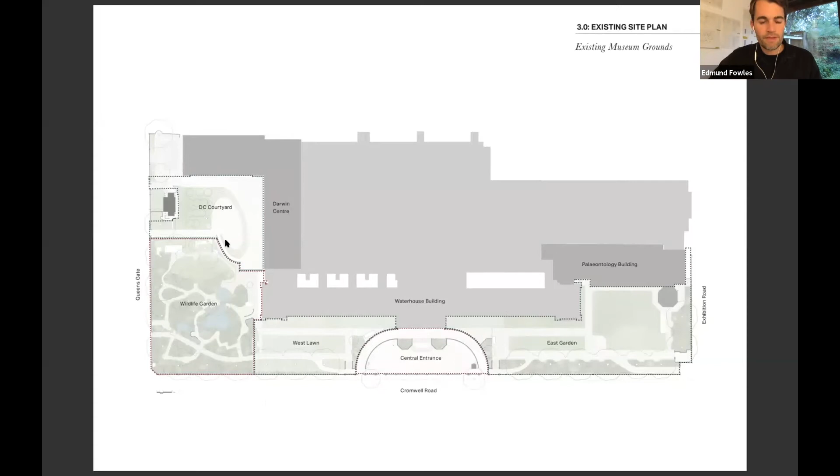So this project is very much a multidisciplinary project. We're the lead designer on it, but we're working very closely with J&L Gibbons, who are the leading landscape designers. And the scope is to redesign the whole of the museum's gardens, and to tell this story all the way from deep time in the Cambrian, pre-Cambrian era, all the way through to the present day here at the central entrance, and then have a representation of all of the current habitats we find within the UK and British Isles on the western side of the gardens, with a showcase of potential ideas for future nature and how we might green our cities and think about urban nature in the future.

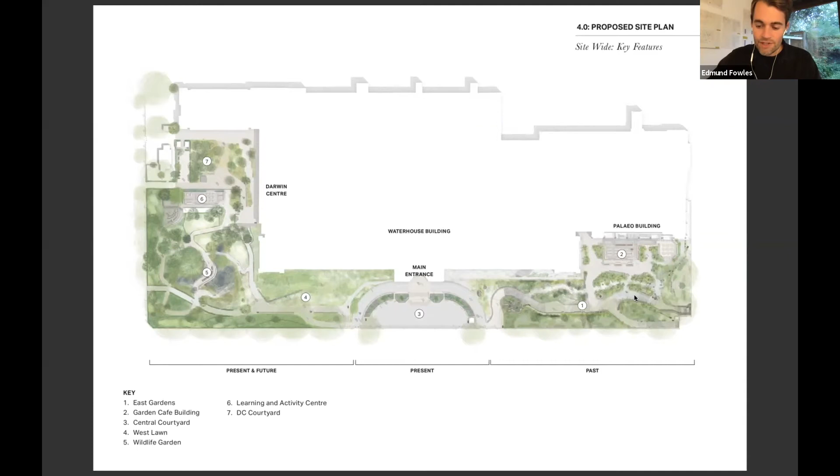So this is a sort of summary. It is very much a work in progress. It's recently gone into planning, but from the east of the gardens here, we'll be moving through a series of gardens with geology and planting representative of that era. So we move from the Cambrian through all of the geological eras, the Jurassic, for example, when dinosaurs came to emergence, through the extinctions to what's currently being called the Anthropocene. And then, as I said, on the west here, we have a representation of wildlife in the UK.

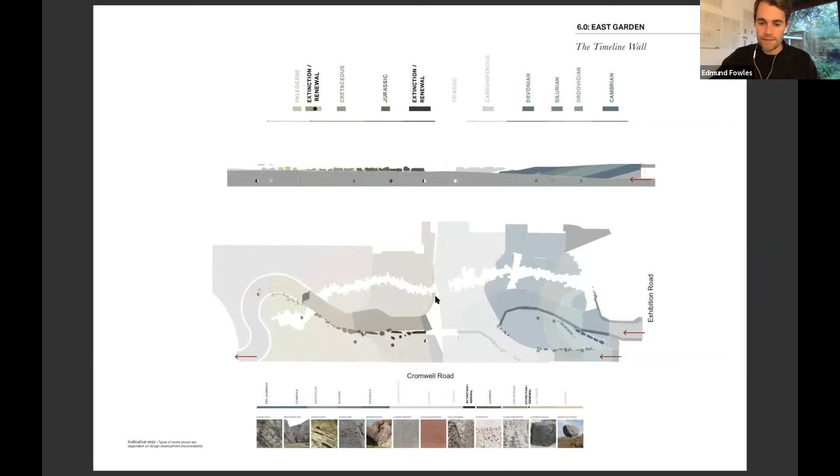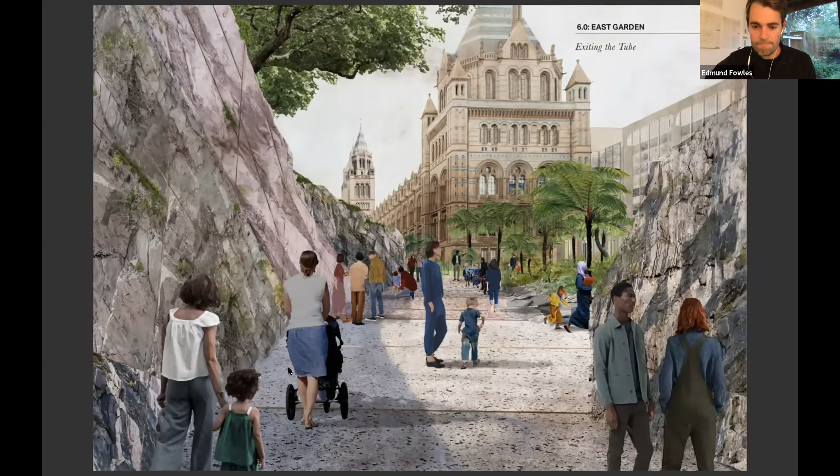And as you emerge up to this part of the gardens, we're in the Carboniferous forests, just before the dinosaurs emerging. So tree ferns and cycads and mosses growing up. So the intention is that the experience is incredibly immersive, and within this landscape will be all sorts of artifacts, whether they be small animals or fossils, footprints and tracks located within the gardens and interpreted.

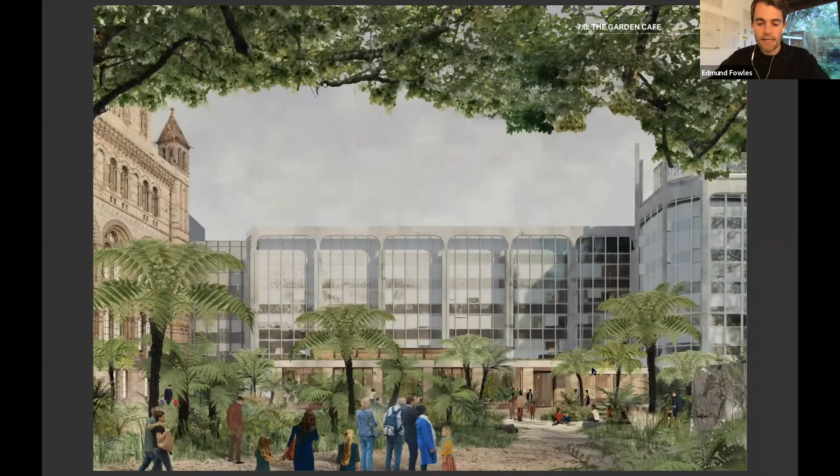But of course there are some buildings involved as well. There's a small cafe facility here and restaurant which secures the museum's long-term economic sustainability, important for them to make an income from the gardens. But this is very much echoing the language of this geological timeline wall. So the strata of rock used in this building are consistent with the geological eras that we're representing opposite the building.

And this is something that Sir Alfred Waterhouse, who designed the original great museum building, I think was playing on when he used this banding of the elevation. Here he's using terracotta tiles, but there's this grey banding which is very, I think, deliberate and distinctive of bedded stone.

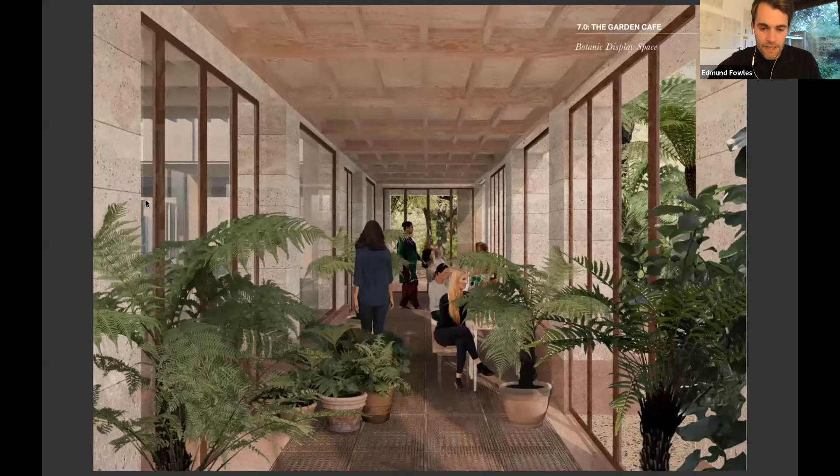So this building will actually be a kind of botanic display space as well. So in the winter, lots of the plants that can't weather the London British winter will have to be brought inside to this south-facing glazed space. And then this in turn is used as a thermal buffer and a kind of a solar gain which can then feed the cafe space.

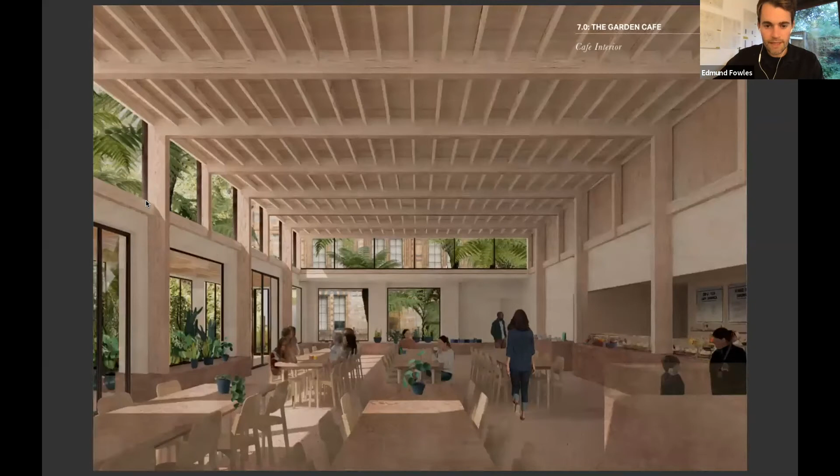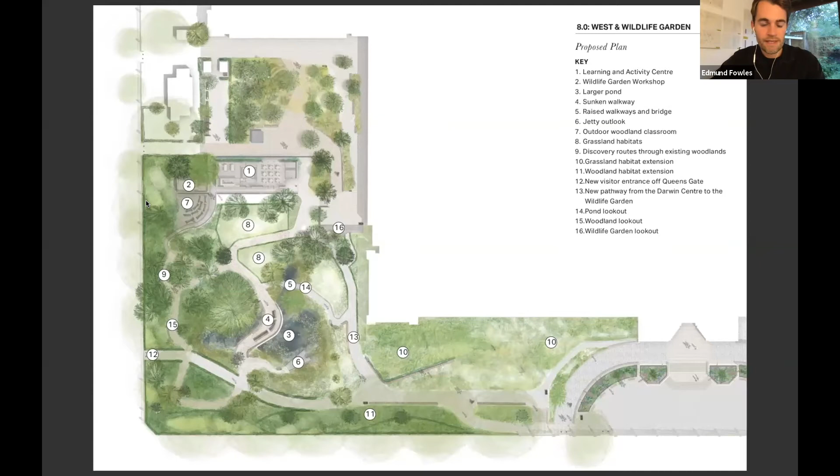It's the main volume, again, all work in progress at the moment. And as you move through to the West Gardens, there's an expansion of the existing wildlife gardens around to the south of the museum, with chalk grasslands and acid moorlands and woodlands. There's about 15, 20 different habitat types represented within this area.

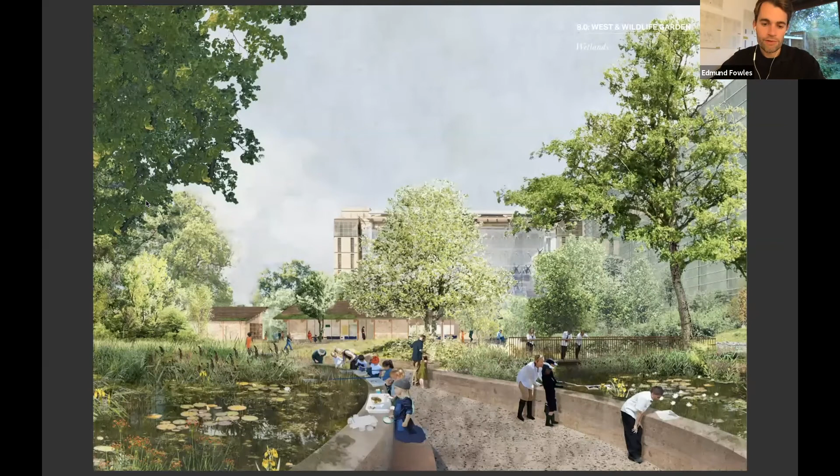And we're creating this sort of sunken walkway through the ponds, which will allow children to engage more and do experiments, pond dip, and really kind of get involved in science and exploration within the gardens.

And then a new learning and activity centre based in the gardens, which serves both for the maintenance of the whole gardens, but really bringing that to the fore and allowing the public to see how the gardens are upkept, what sort of activities go on in terms of cutting back, collecting leaves, composting, but also it's a kind of lens into the amazing science that goes on.

There's about 300 scientists based at the Natural History Museum, and many of which are doing experiments within the gardens themselves. It's so important and vital that we learn more about our kind of urban nature and about species that are being lost so rapidly, and this urgent need to kind of green our cities.

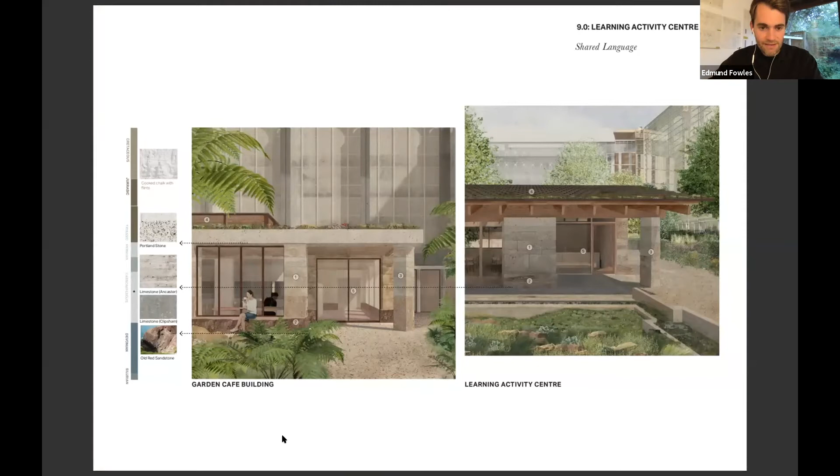So this is just briefly touching on the kind of relationship between those two buildings and that geological strataing of the plinth to the two buildings. Again, bringing in lots of the learning as a practice that we've had from our studio building here and later from the Weston in Yorkshire.

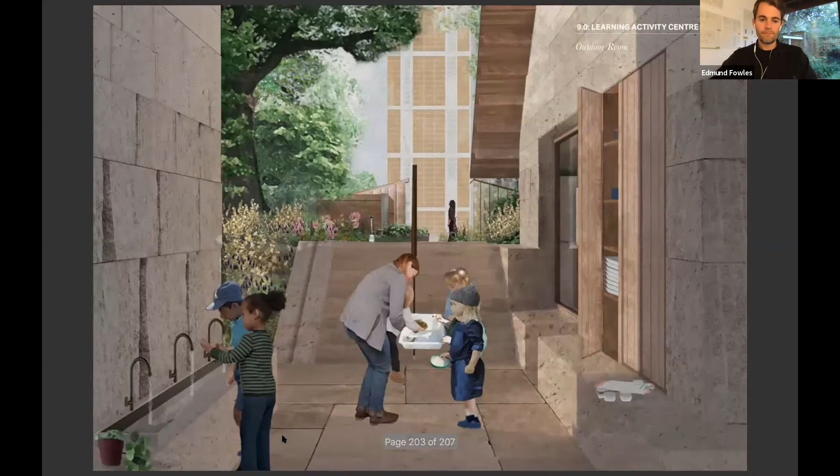And some of these sort of in-between spaces, where a lot of the activities are intended to happen outdoors. So the outdoor of the building is very activated with places to wash hands, places to store gardening equipment, as well as a more conventional kind of classroom space, but that's connected into the landscape.

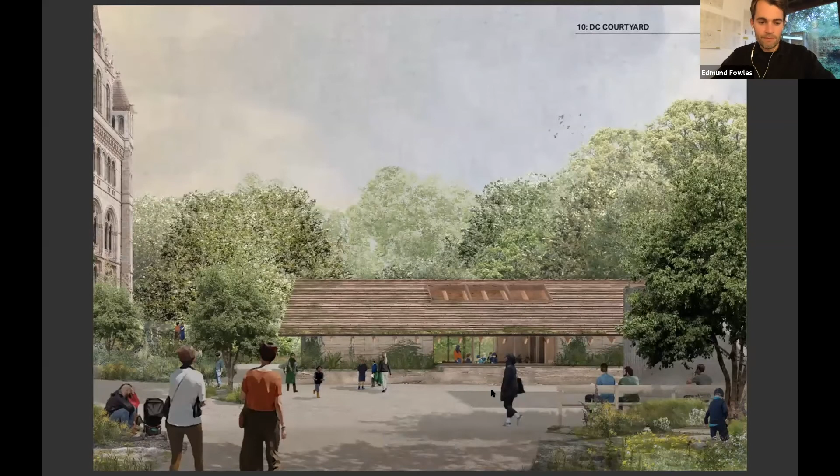Thank you. Thank you very much, Ed, for what was an absolutely fantastic lecture. I think it was extremely impressive, both in terms of the body of work, but also all the pedagogical lessons that I think the work embodies for our students.